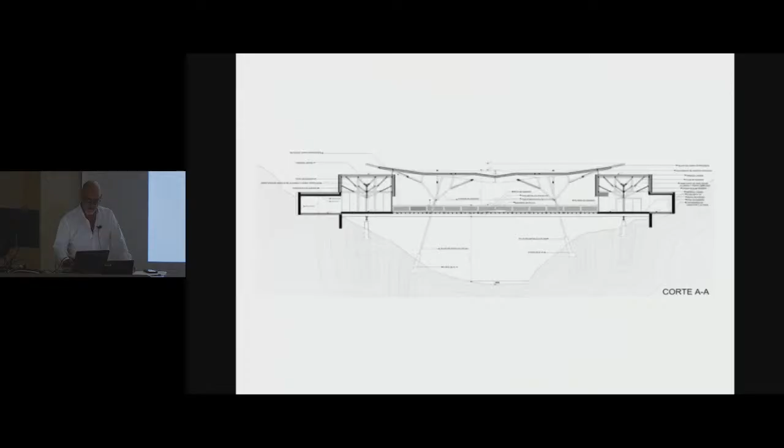And the forest, the trees, for me, is the architecture. And the forest is the city. This is our city, Asunción, our forest. And this is an urban planning, an urban project for my city that we recently made.

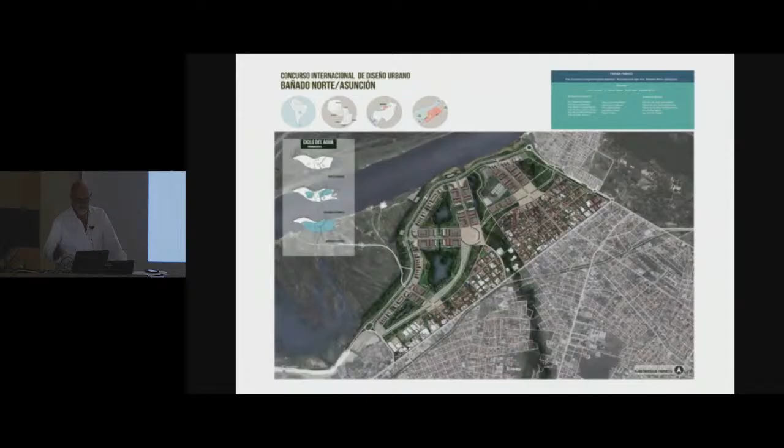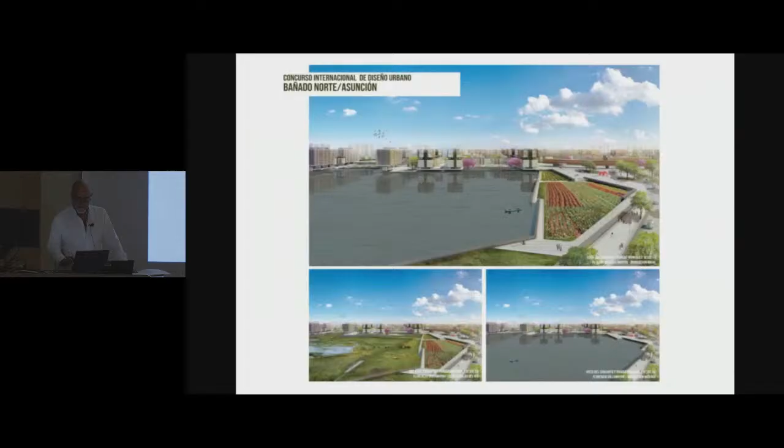This is probably most of the projects and works that we did until now, in around 25 or 30 years of profession.

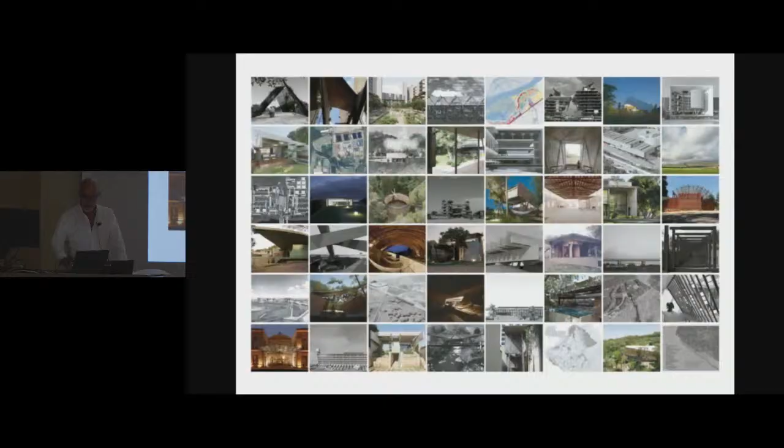So, if you remember one of the first drawings, this is the Osypyte house. This is where I live and where our studio is, the Laboratorio de Arquitectura. This is in the center of the image. And all of the others are the projects that we are going to see now.

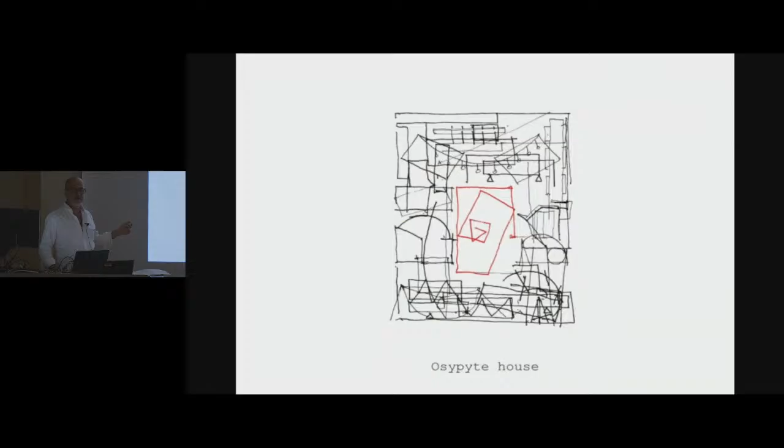Like I said, the tree, this is the structure of the house. A wall of 70 meters without a pillar.

Well, this is another house. It's the Surubi'i house. Surubi is the name of the fish, a very typical fish for the Paraguay River.

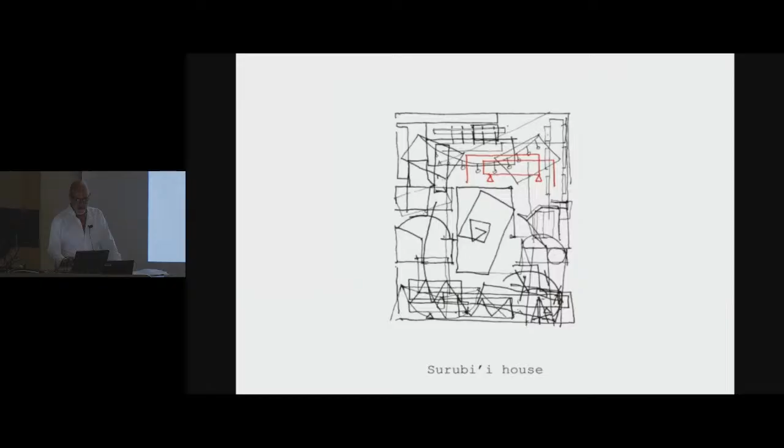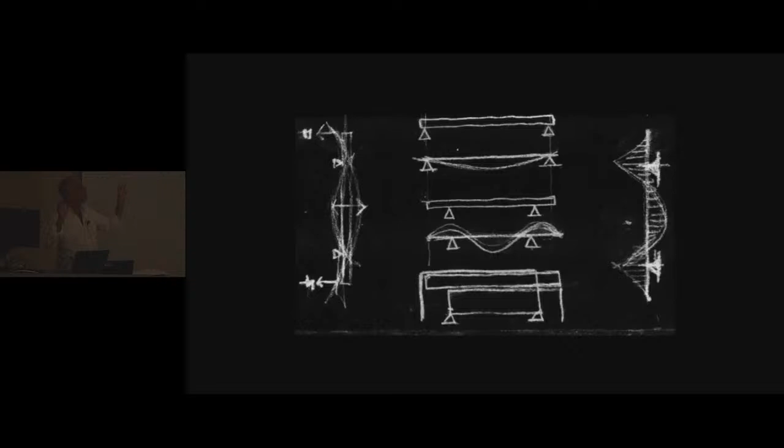So this house was a house that we thought against how do we think the structure. Just thinking how just a simple beam can work. You see upstairs a classical beam, and what happened with the deformation of that. But if we take the support to the center, the beam starts to work better.

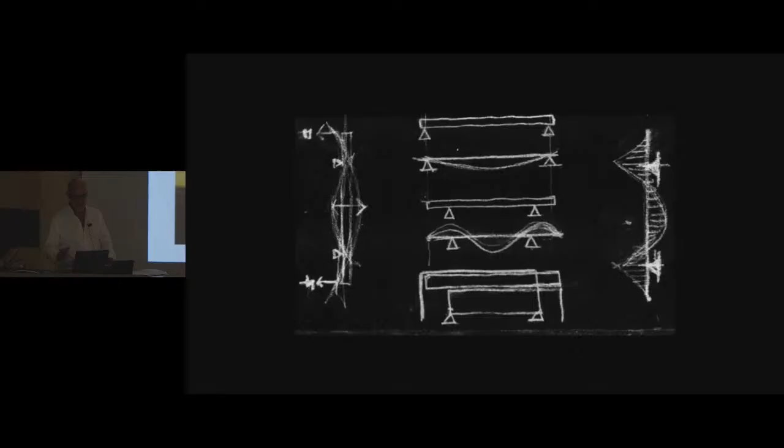Like this. This is a beam and a weight right on the center. And how it starts. And if the distance between the supports is not enough, we just can put a weight to get the perfect beam for that.

And the weight is the wall that doesn't arrive to the floor, to the ground. This is the main entrance.

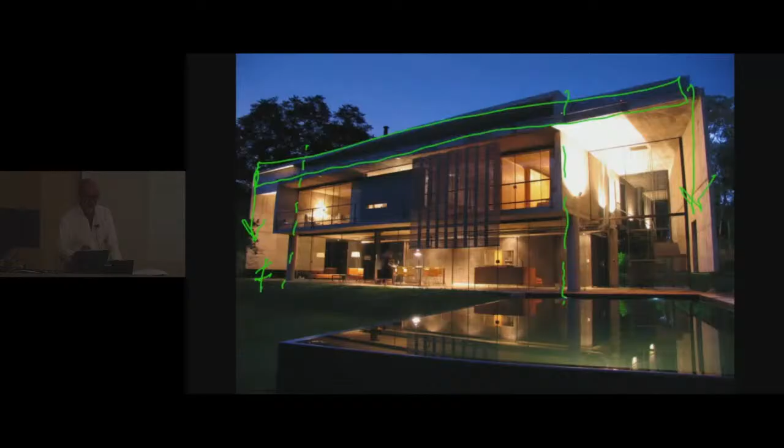So you can see here the beam, the support, 4 pillars, and the weight. And this is how it works. All the floor is hanging.

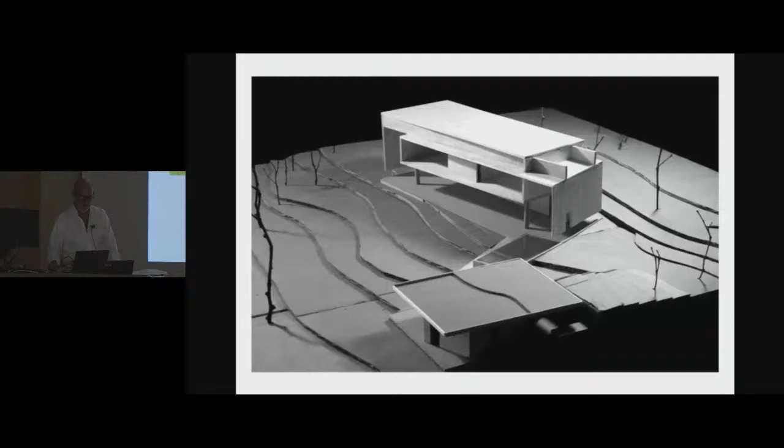Another work. We are going to see very quickly, very fast, some projects, and then we are going to stop on 2 of them. This is the Umbraculo house.

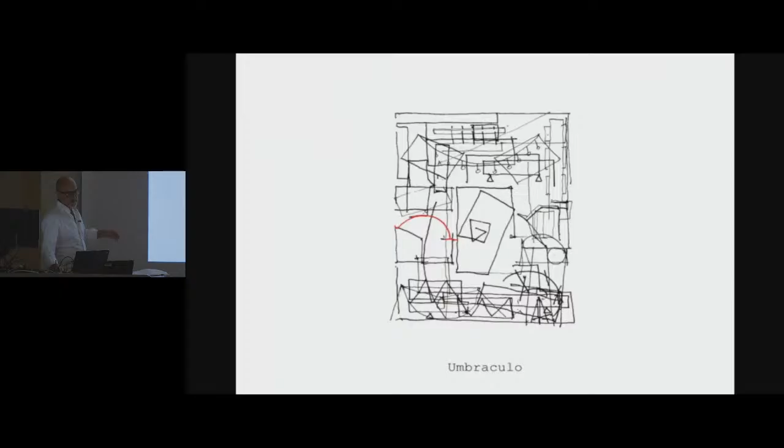And the problem was just to think how a vault can work, but with recycled material. And this is the technique.

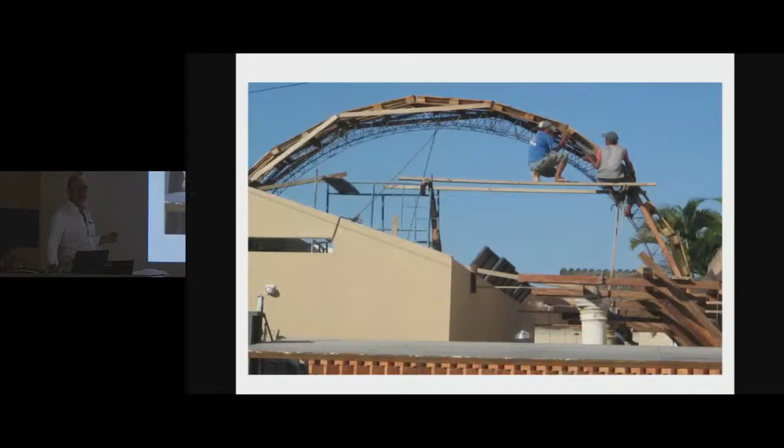This was a very old house, a sort of heritage of the downtown of our city. So this is the space that we did on the 2nd level, to have a double layer for the weather and for the sun, just to build a shade. Filters, double roof.

And this wall is black because the owner is a writer, so she can write inside on her wall.

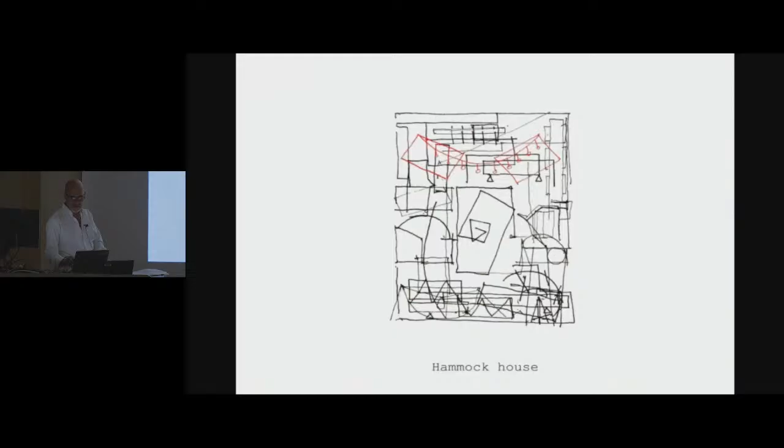This is another one. This is the hammock house. It's a structure for assembling, and a surplus of material with construction waste.

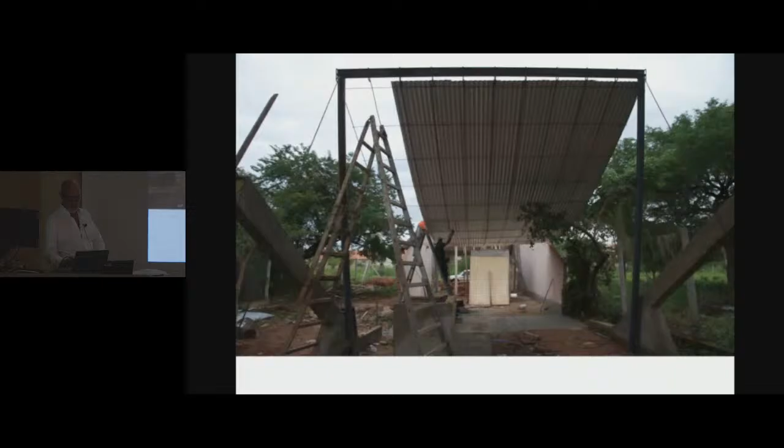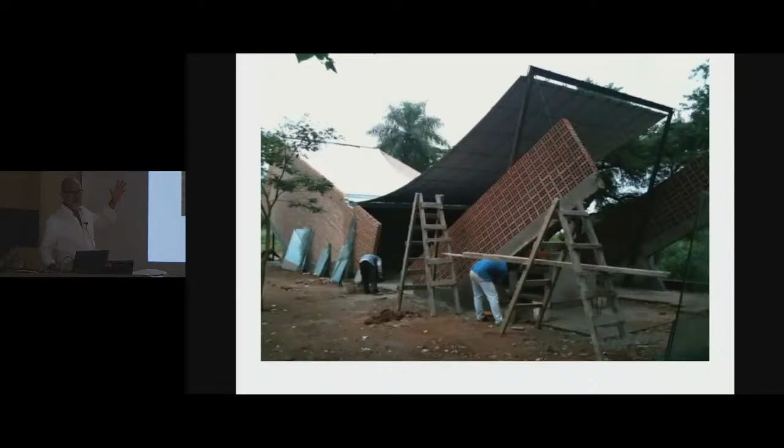We have many materials for that. And stones just to give weight for the roof. Very light roof.

The doors are like a garage system. And the most important space in the house is always near the outdoor space.

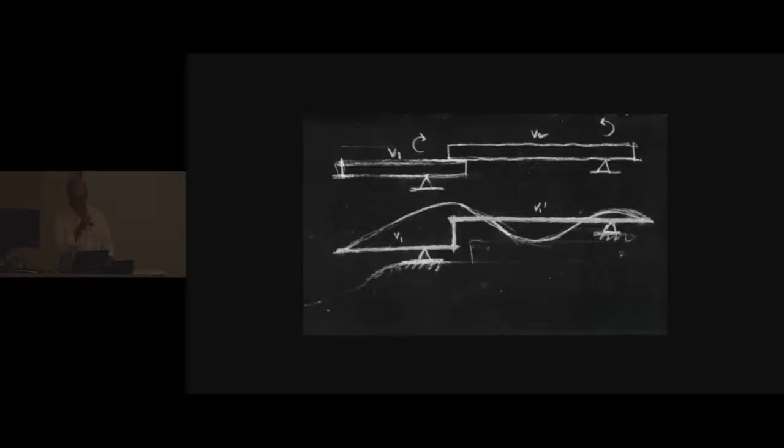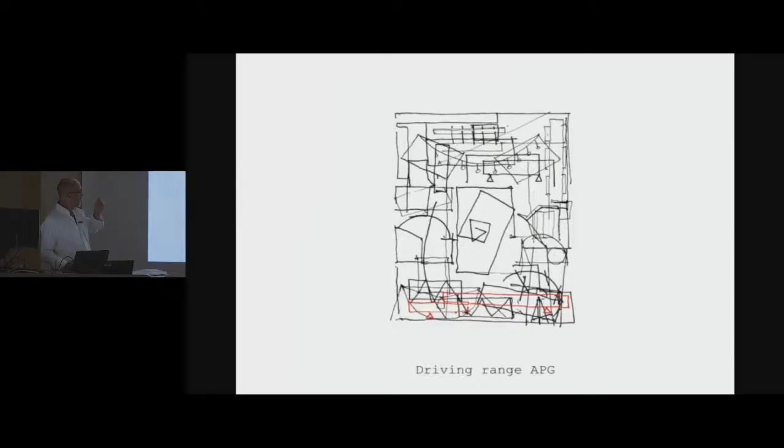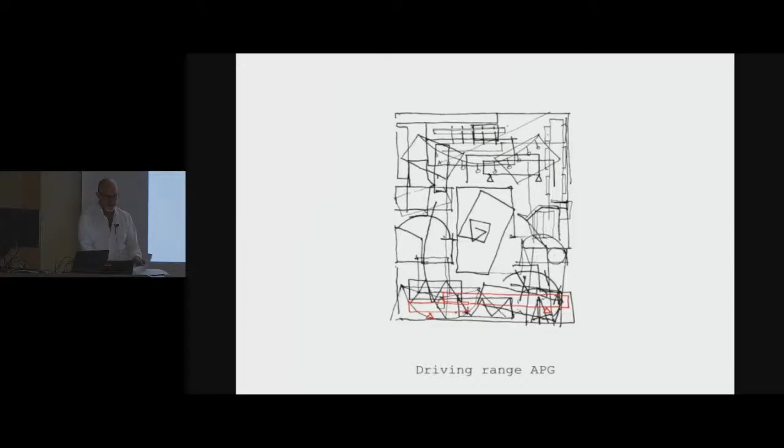This is another work. It's a driving range for golf, for the APG, that is Asociación Paraguaya de Golf. It's just a simple structure that - the question is now how two beams can work to make 25 meters of cantilever.

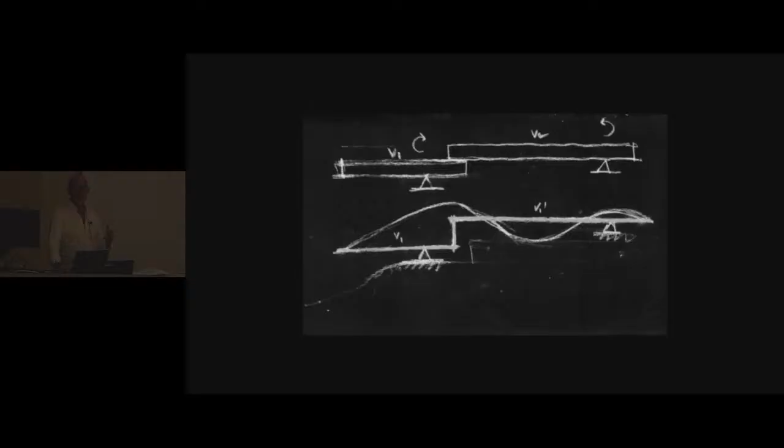Because at the side of the cantilever was a stream. This is my son. And this is the idea.

And this is how we do variations to know the relation of support and two beams, how it can build different projects, and finally, all the structural calculation to have this. This is the 25 meters of cantilever.

There you have the stream in the dark part, and the topography, the ground goes down. So players can be here.

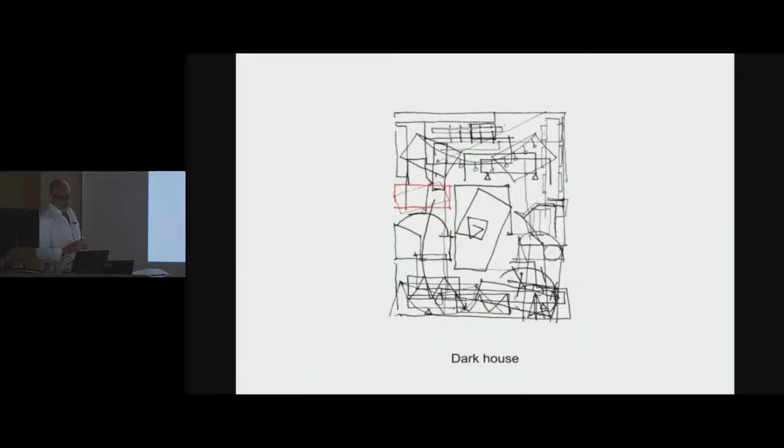Okay, another one, the dark house. Dark house is a pinhole box. It was a house, transformed. It was a house for a filmmaker, and how a filmmaker can live in her own chamber was the topic. This is the very famous film of Paz Encina, the filmmaker. She won a prize at Cannes. So this is the way we explain her.

She came to us to ask for a house because we did the hammock house. The film, the movie, was La Hamaca Paraguaya. So we said she is going to do many films, and the hammock house was not the right house for her. So we thought of another idea.

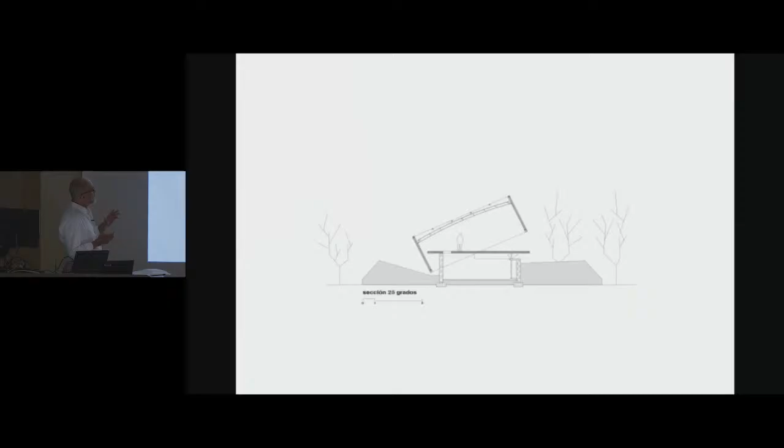Why is it a pinhole box? Not just because she's a filmmaker. It's because she was studying in Berlin, so she is going to live in this house only two months a year for vacation. So nobody is going to take care of this house. That was the problem: how to do a house that nobody is going to care for, and also the budget was only $20,000.

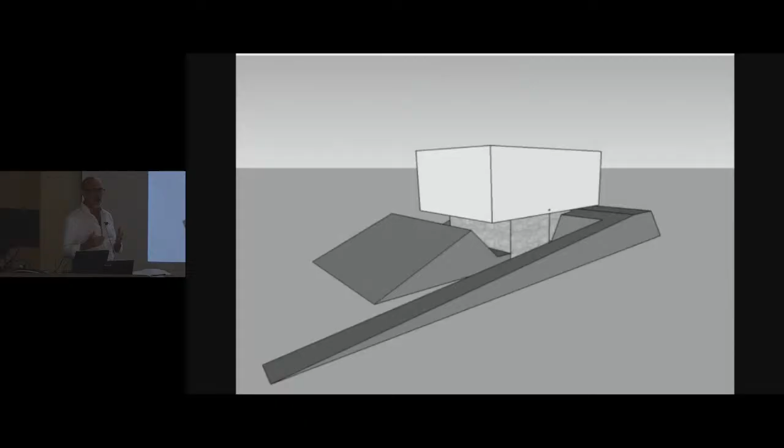So this was the renders and the explanation of the idea. This is the house already built. She is Pasita. This is how it works when the box is closed. You can see the outdoor image on the walls, which is inverted. So the house is blind, but in some way it is transparent. But it's for a filmmaker, it's not for a lawyer. And this is how it works.

Okay, this is a video that just... I don't like the video. It's a simple video that shows how the script works, how the box can be open in real time. I don't know, because I don't see the triangle for play, it's all black. Okay. No, really, it's not important. Well, if you want, what happened? ...losing time. Okay, excuse me.

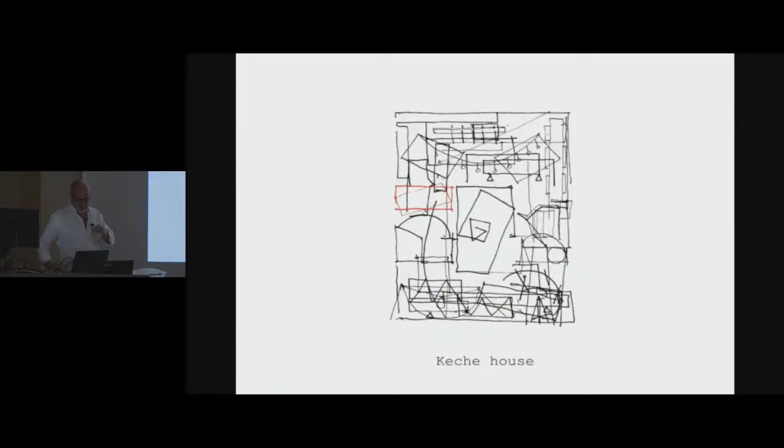Okay, the Keche house. Keche house means crooked house. Why crooked? There is a story behind this. As you know, Saint-Exupéry is the famous writer and pilot who invited Le Corbusier when Le Corbusier went to Buenos Aires, to fly on the first flight to Paraguay.

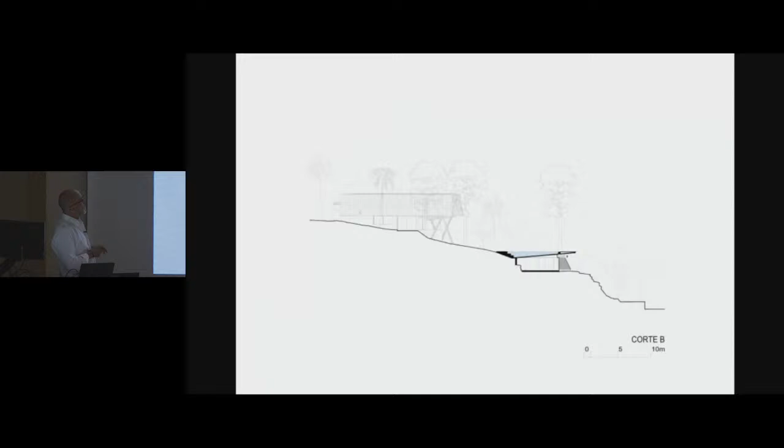So these are the sections, the plans, and this is the house. This is under the swimming pool. That's why I said a submarine, because it's under the water. And you can go to the house. That is a periscope to see that view.

But you see here, this is a beam covered with wood. This is the entrance. But on the other side, in the other facade, we had the same beam, but one is on the ground and the other is on the support. So this is why it is crooked.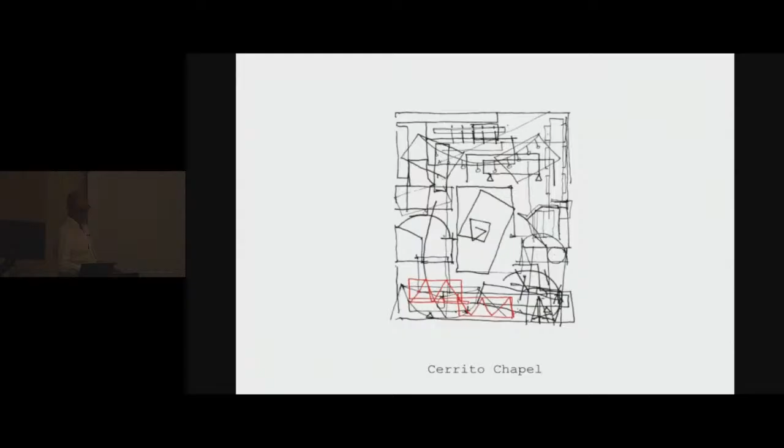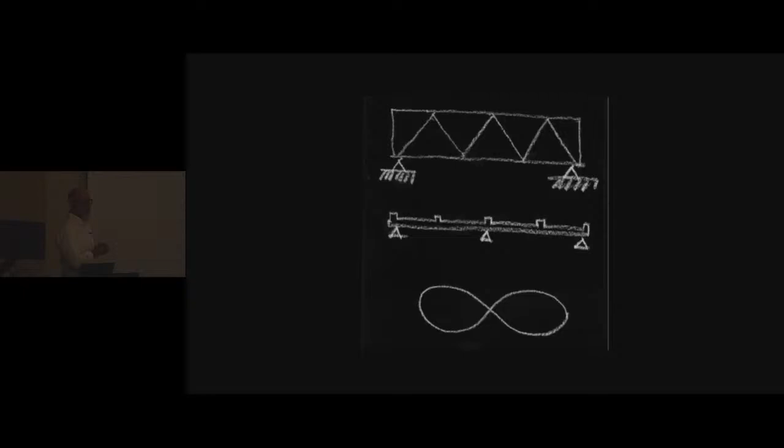The Cerrito Chapel is a chapel that started the story because the Pope went to Paraguay to give a mass in a very poor neighborhood. So he saw this chapel, and this is the neighborhood. It's very poor people, there are very little houses. This was the old chapel.

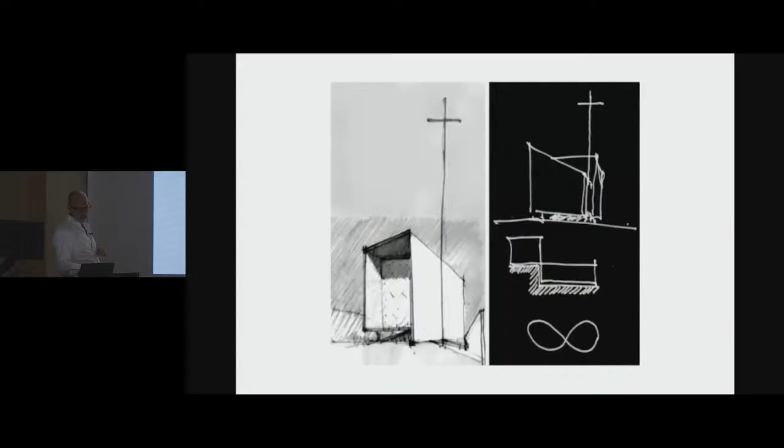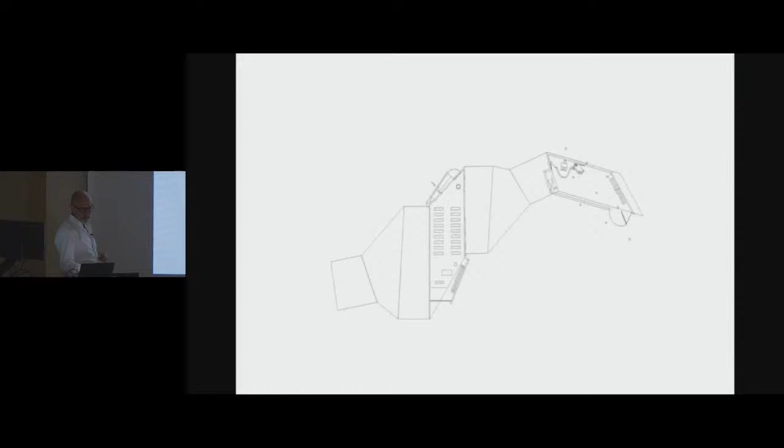And the challenge was how to do a bigger chapel, but not with a big volume. So how could the structure be so that we can have, in one structure, two volumes? And this is the Moebius tape that gave us the structure to have this.

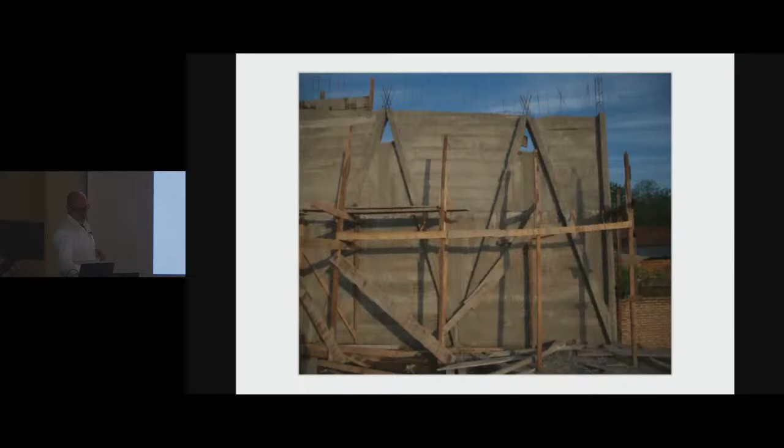The form for this structure was garbage. That's why the garbage was printed on the walls, so you can see the difference. There were doors, woods, whatever we found, was for the form of this.

It was an auto construction - can we say that? An auto construction experience. And all the structure is just about how we can have concrete, because in this neighborhood there was a community of concrete workers. And they asked us to do it in concrete.

And the situation is that it's a very dangerous neighborhood, so most of the chapels are stolen from. So this chapel is always open and doesn't have nothing, just...

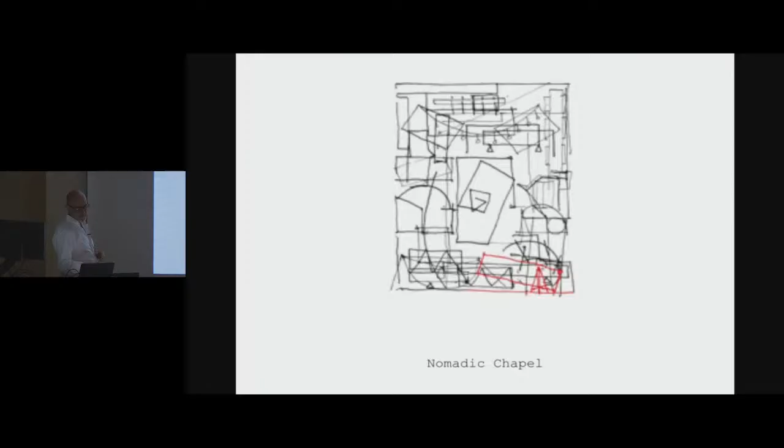This is why the curator of the Venezia Biennale said that the Pope chose us to do this nomadic chapel for the Vatican Pavilion. And why is it nomadic? Because the Pope, or the Church, wanted to, after the Biennale, take the Church to another city that had an earthquake, where, for example, they lost the chapel of the city.

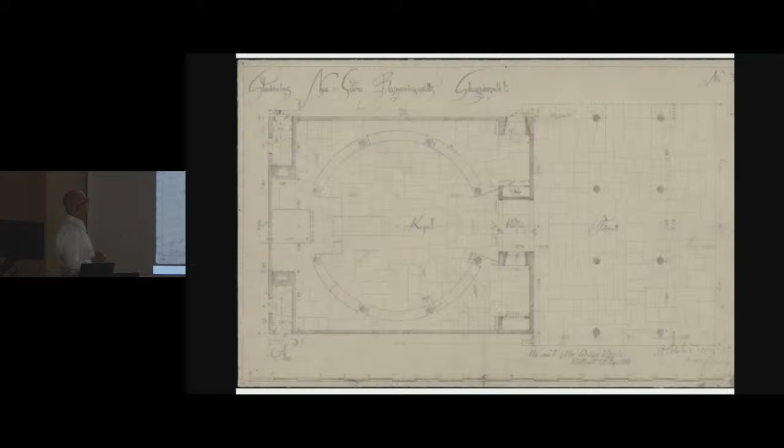And Gunnar Asplund was the reference for all the participants - we were 10 architects. And this is the place that Asplund did the Chapel of the Forest. It's very known because it's a Nordic house with the Pantheon inside.

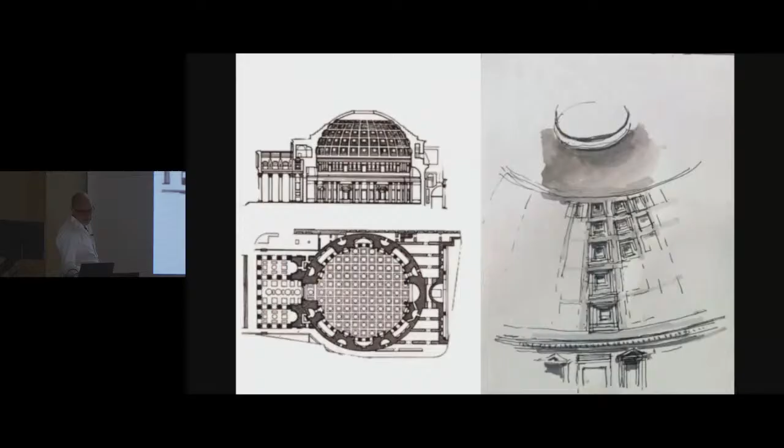The idea - this is the place, Venezia, and this is the forest, a park, behind the San Giorgio Island, behind the Palladios Church. But these are the situations of the earthquake.

And the most curious story is why they asked a Paraguayan architect to do a project for earthquakes, because we don't have any earthquakes in Paraguay. So we started to research how we can do an earthquake structure.

And this toy, I think everybody knows. When Paulo Mendes went to Paraguay several times, I had the opportunity to ask him, because he's a master of structures, how can you think that this bird can work? He said, I don't have any idea, but I just want to tell you this.

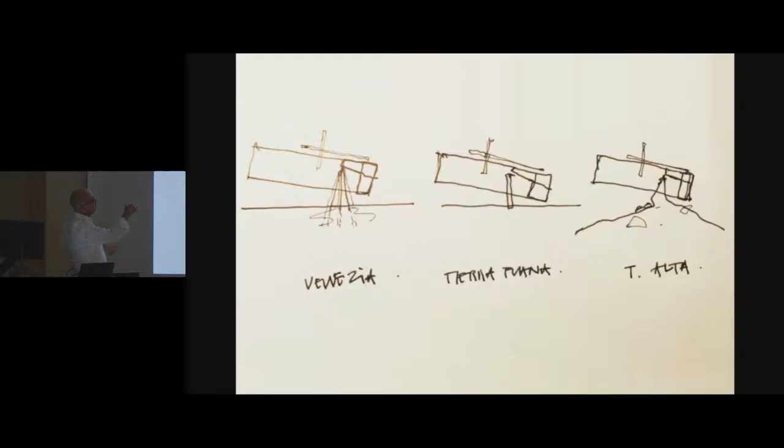And remembering Navarro Baldeweg and the bird, we did this for that chapel.

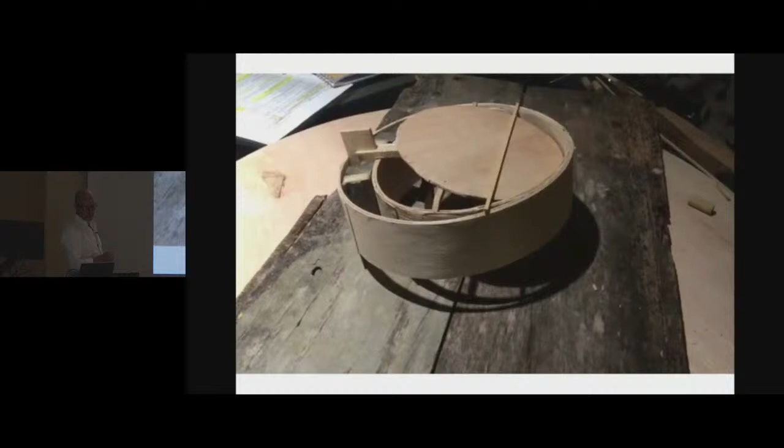It could work for an earthquake.

You see, this was the first model of the roof.

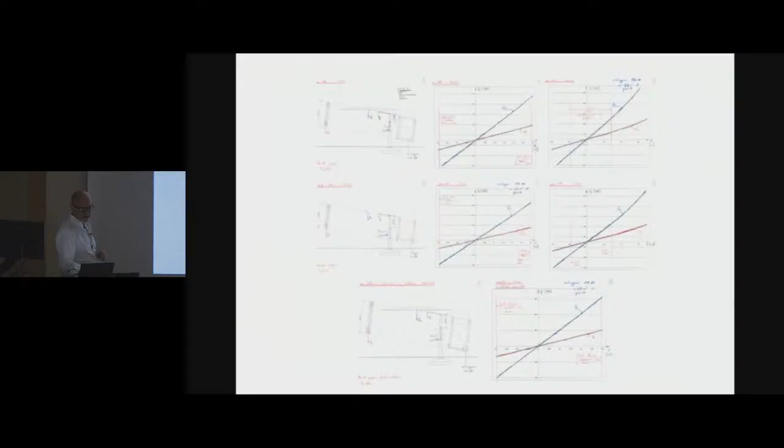These were the calculations for the storm, the snow, the earthquake that an engineer did. And these are the final project. It all had to be built with wood.

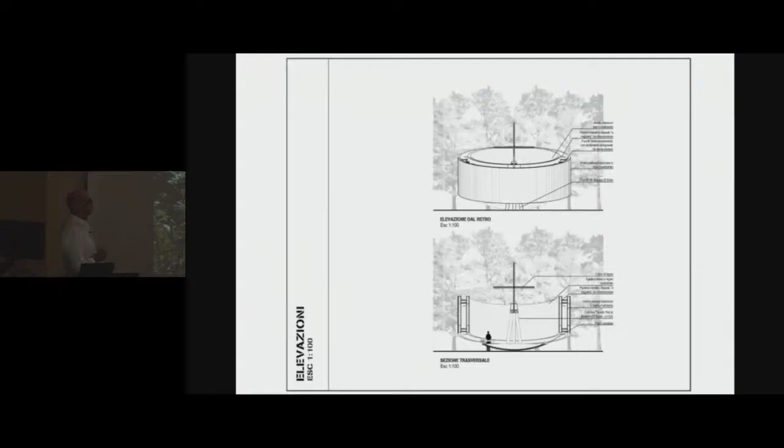This is the model that we used to do in the lab, in the laboratory, in the studio. It's a model that has 70 kilos that works exactly so the structure is going to work. The real chapel is going to have 20 tons in the back to have all the volume on the earth.

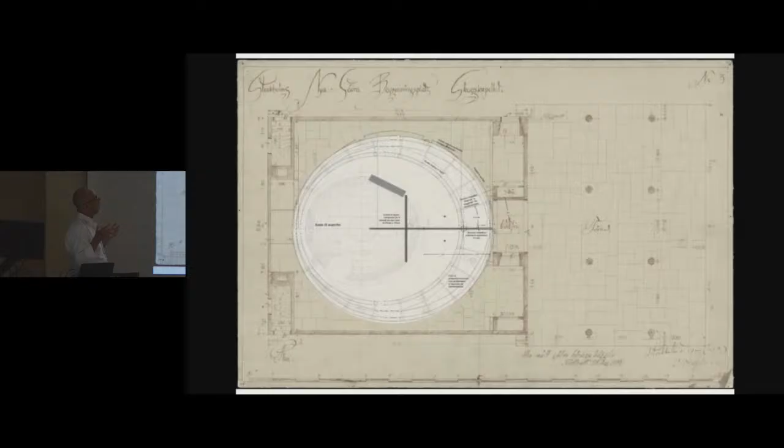This is the plan of our chapel, reminding the Asplund project, that is the circular space in the interior, that is the Pantheon, that we gave outside. But all the chapels had a mecena, a sponsor.

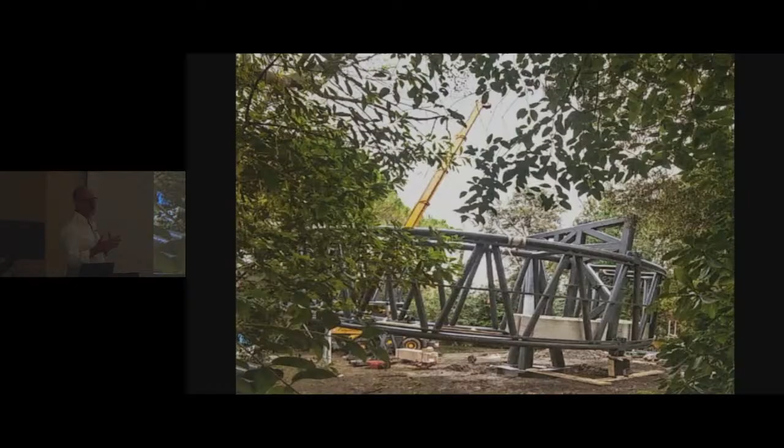The stone one that Souto de Moura did was a cave, and the other ones, but they didn't find any sponsors that could do the wood structure, because the Vatican can't spend money for a festival of architecture. So they searched for sponsors to do all the chapels, and this was a frustration, because the only way they found how to do it was with a metal structure. So we just gave the wood as a skin for the project.